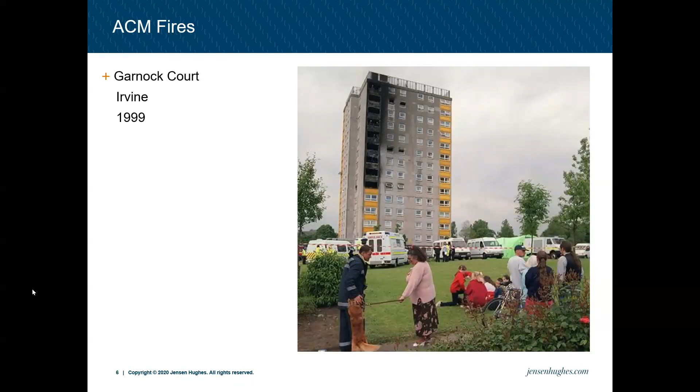So what is aluminium composite cladding? Well, effectively, an aluminium sandwich with a plastic core. The sheets of aluminium are typically 0.5 millimetre thick, and the core, plastic core, is about 3 to 4 millimetres thick. This core has typically been made of polyethylene, which is highly flammable. Next slide.

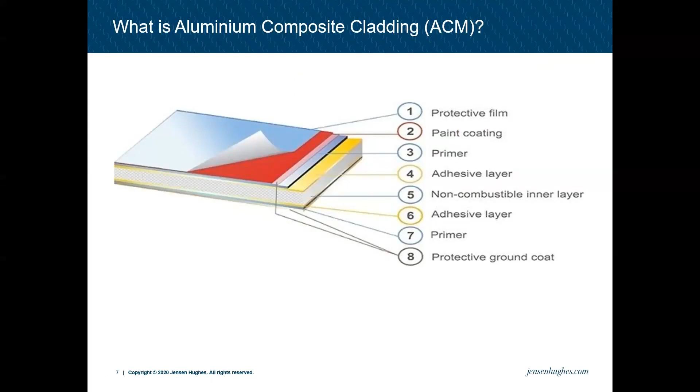There have been many ACM fires over the years, and I've listed perhaps the most well-known of them. Next slide. The first occurred in 2009 in the Television Cultural Center in Beijing, and this is one building which is aflame. Next slide.

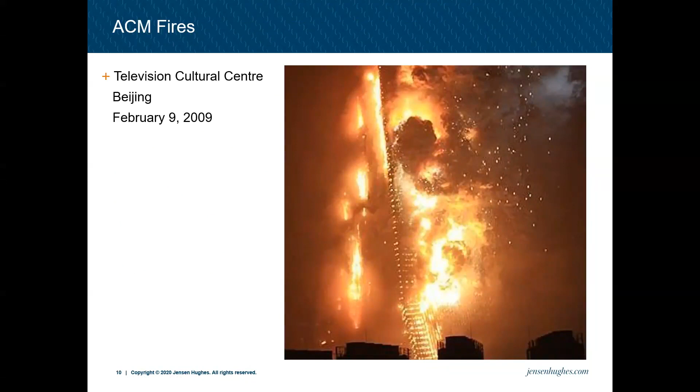And 5 years later, in 2014, there was a fire in the Lacrosse building in Melbourne. Again, rapid vertical spread and horizontal spread of this fire.

ACM was popular and is popular in Dubai, and there have been several ACM fires. The best known of them are the Address fire, which occurred in 2016.

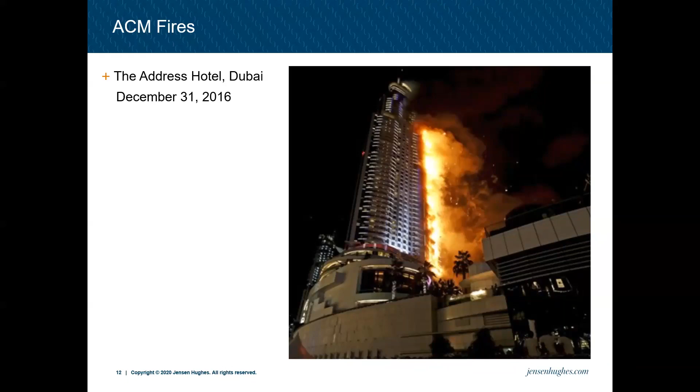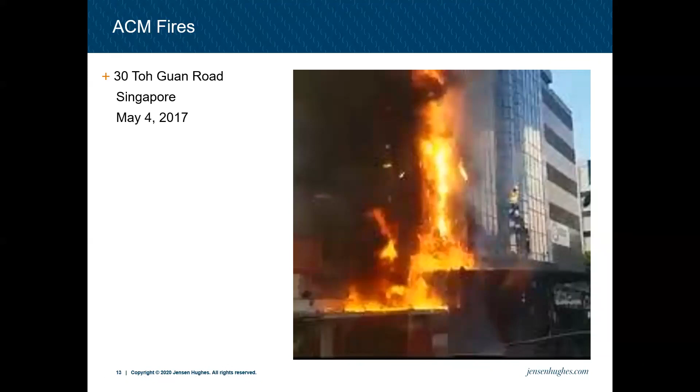And there was a fire in the Torch building, which I'll illustrate in a minute. But this fire is interesting. It occurred in Singapore. Sadly, a lady was killed in the stairwell, which was open to the cladding. And quite how this fire originated is not known to me, but it spread very quickly up the external facade.

Note the date, May the 4th, 2017. And the next slide shows the Grenfell fire, in which 72 people perished just 6 weeks after the fire in Toh Guan Road in Singapore. Rapid vertical spread from the floor of origin to the top of the building within 20 minutes. And then the fire began to wrap itself round the building, having spread at the crown and spread downwards. Most unusual fire spread.

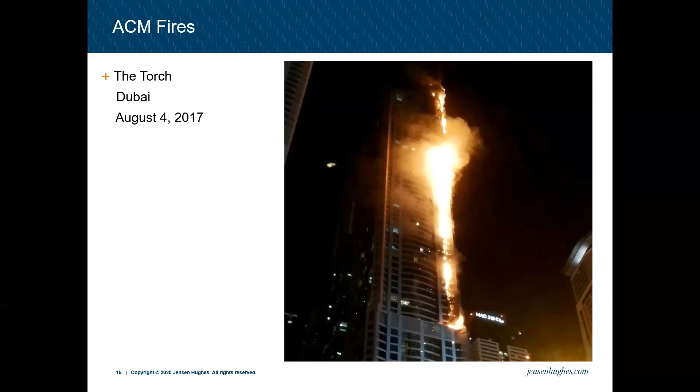We're also concerned with high pressure laminate fires, and there have been 3 fires of note within the UK.

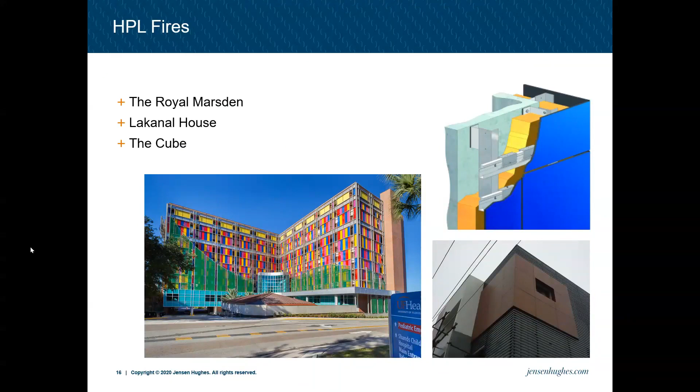At the Royal Marsden Hospital, which was well documented. There were TV crews there to record the spread up one of the towers of the hospital, and then the roof became engaged.

Better known, the fire at Lakanal House in 2009, in which 6 people died. Interesting fire spread both vertically upwards and vertically downwards in this case.

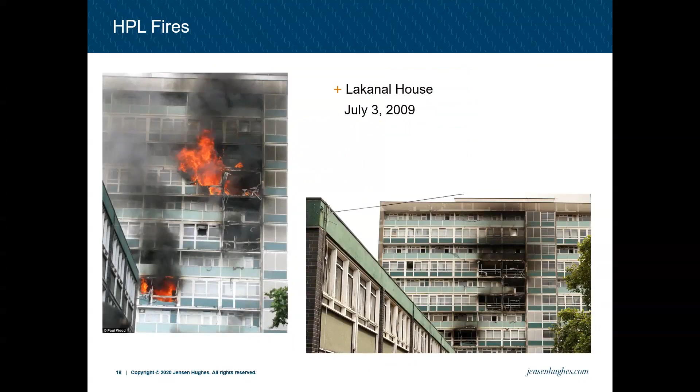And more recently, the fire at the Cube in Bolton.

These fires have caused a lot of research to be done, and this latest paper that came out in the early part of this year by McKenna et al. compares the fire behavior of different types of modern facade materials, and I've summarized the results on the next slide.

What you will see is that the peak heat release rate of ACM and of HPL is 55 times and 25 times higher than the least flammable panels, and they release a lot more energy over a longer period of time.

They also compared in their tests polyisocyanurate foam (PIR) and phenolic foam with the least flammable sorts of insulation, stone wool and rock wool. And you can see there that the total heat release rate from a polyisocyanurate foam is 35 times higher, and a phenolic foam even higher than that, 48 times.

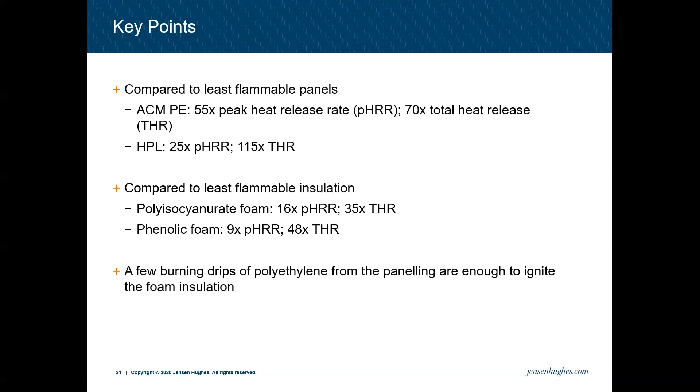So there is a lot of energy contained and able to be released in a fire with these insulation materials. And one of the things that the researchers note is that a few burning drips of polyethylene from paneling are enough to ignite the foam insulation. And with that, I'll hand over to Ben, who's going to talk about the present climate in the UK.

Thank you, Jim. Before I get onto the present climate, it's probably worth a few slides which cover the climate prior to Grenfell, because I think that helps inform how we got to where we are.

So on the first slide, this is showing the trend in fire-related fatalities in England in the 15 or so years prior to Grenfell. The top line in the graph is showing fatalities in dwellings, which is where the vast majority of fire deaths occur. As you can see, the trend is broadly positive, from around 350 a year at the turn of the century to just over 200 in the years immediately before Grenfell.

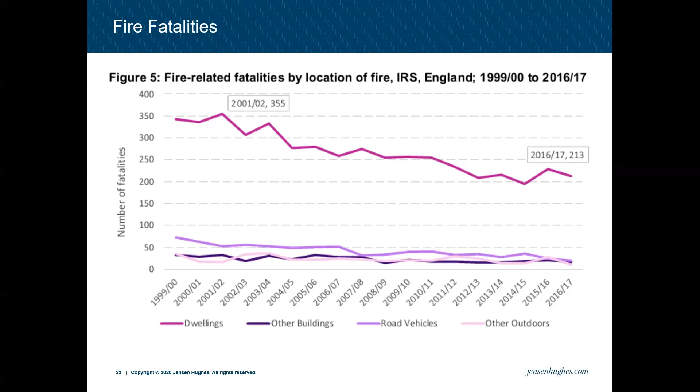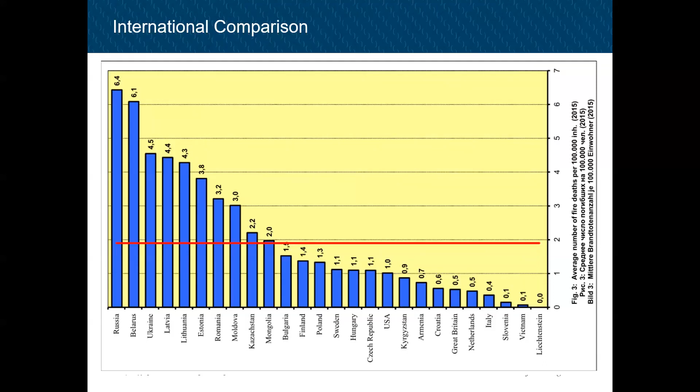That also compares reasonably well internationally. This graph is showing data collected by fire brigades around the world. Now, international comparisons are very difficult, as we're constantly hearing about with COVID at the moment, but it's equally true of fire statistics. Different countries collect data in different ways, so it's probably not a perfect comparison, but as far as it goes, it looks pretty good. Great Britain is down there in the bottom right at around about 0.5 fatalities per 100,000 inhabitants, and that compares pretty favourably with the rest of Western Europe, and certainly better than countries in Eastern Europe, for example.

So another factor which has perhaps influenced the climate in the run-up to Grenfell was... what's the word I'm looking for?

Building control has been deregulated since about 1985 with NHBC, and approved inspectors since 1997. That's brought competition into building control, with developers essentially being able to choose who approves their building. Some would certainly argue that's been a factor in how standards have changed. Personally, I'm not so sure how much of a factor it is, but it's certainly been raised by some.

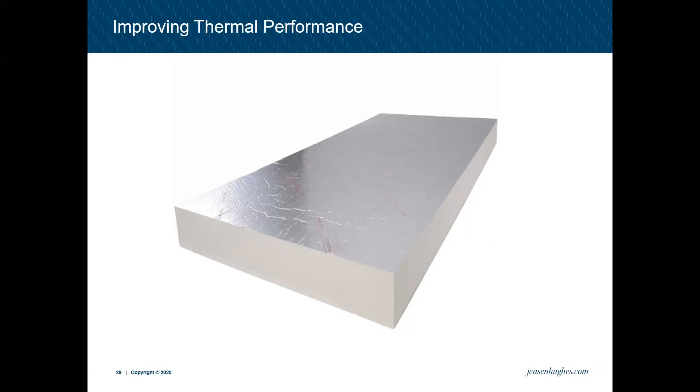Another factor is the use of combustible foam insulation, which Jim touched on, typically phenolic foam or PIR foams. They've been used for perfectly good reasons. Principally, they perform a lot better than non-combustible alternatives, such as mineral wool. So you need less thickness of foam to achieve the same performance, meaning a developer will get a bigger flat for their plot size. They're also easier to work with and lighter. So there are significant advantages in using them, at least from a non-fire point of view.

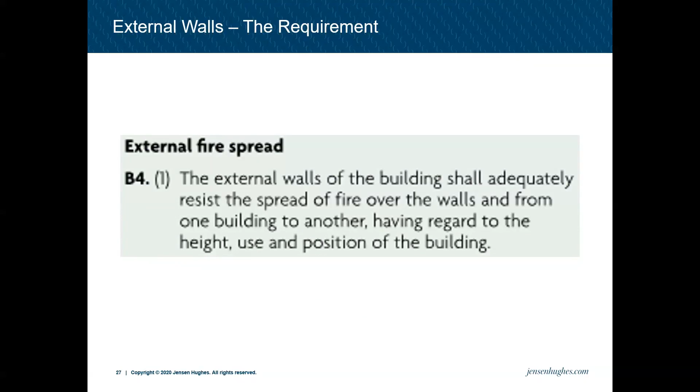So if we go back to the fundamentals, this is the requirement we're looking to achieve for external walls. This is the building regulations requirement, and as you can see, it's fairly short and sweet. The requirement is that external walls should adequately resist the spread of fire. What that means isn't defined. Certainly for low-rise buildings, there is no specific guidance unless you're very close to a site boundary. For what are known as high-rise buildings, with a floor over 18 metres in the UK, or England at least, there are two options given in the guidance.

One option is to use limited combustibility materials, essentially materials which don't contain large combustible content and don't burn very well. I appreciate there's going to be a big debate in the Grenfell inquiry as to whether the guidance actually covered ACM cladding adequately, but we're not going to get into that here. The other option given in the guidance is for the whole wall assembly to meet the performance criteria given in BR 135 using full-scale test data.

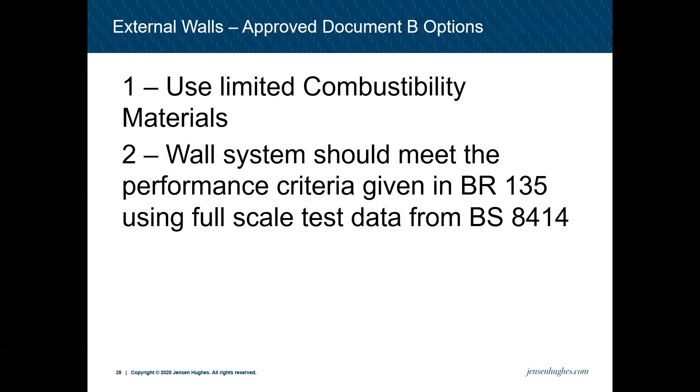This grew out of essentially ad hoc tests carried out at the BRE back in the late 80s, and this led to the development of the BS 8414 test and the BR 135 guidance, which is the only measure of fire spread that relates back to that building regulations requirement and defines what is an acceptable rate of fire spread. Jim is going to talk more about the fire testing in detail and what these ad hoc tests have evolved into in the next section.

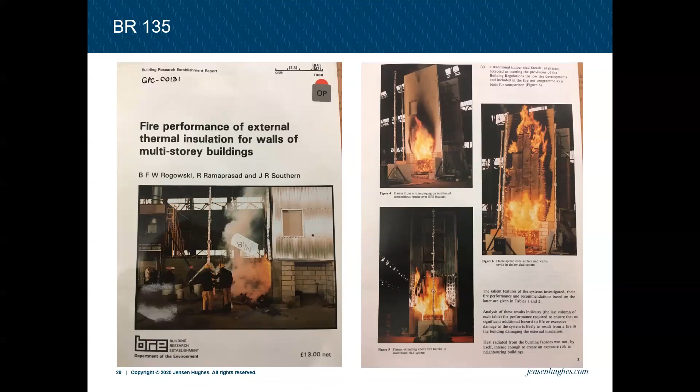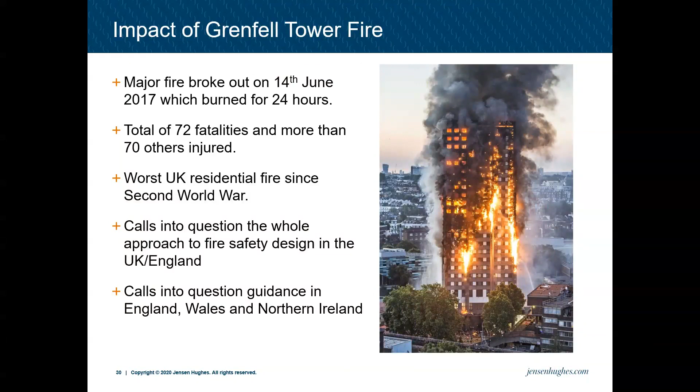So Grenfell Tower, Jim talked about it. It's obviously going to change things enormously in terms of the approach to fire safety, the whole regulatory system, and the guidance applicable to buildings in England and Wales, and beyond.

So the government response has been multi-stranded, as you'd expect with such a major disaster. Initially, it's focused on testing of wall systems with ACM cladding. There's then been a series of advice notes issued principally during 2019, with a summary of all those advice notes issued earlier this year. The public inquiry is ongoing and is currently in phase 2. There's been the Hackitt review of the building regulations and fire safety, essentially a review of the system. The key conclusion was that the construction industry is deeply flawed and needs a radical overhaul.

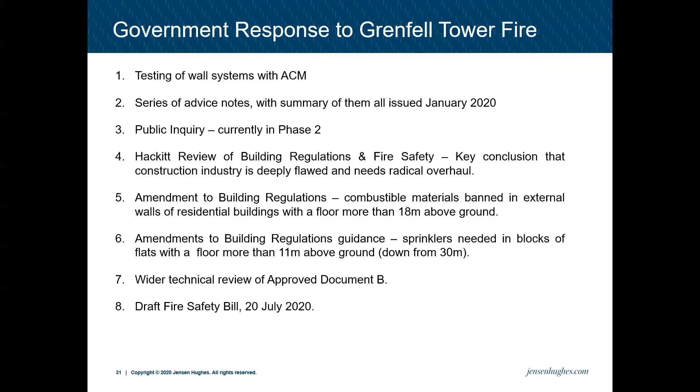There have been amendments to building regulations. Combustible materials have been banned in external walls of residential buildings with a floor more than 18 metres above ground. The guidance has also been amended to require sprinklers in blocks of flats with a top floor above 11 metres above ground, down significantly from 30 metres. There is a wider technical review of approved document B in the offing, but timescales are a little unclear at the moment, and it's going to have a very wide scope, so it might involve research and could take a while. The draft fire safety bill was issued last week, and that's the government's response to Hackitt, which I'll touch on more in a few slides.

So the government initially tested a range of ACM panels from buildings in small-scale tests. There are three categories: one is limited combustibility. Category 2 involves panels where the PE core has been treated to provide some degree of fire retardancy. Category 3 is where the PE core is unmodified, i.e. no fire retardancy whatsoever. The government tests showed that the vast majority of buildings used the unmodified PE core ACM. There was a proportion, less than 20%, that used ACM with some degree of fire retardancy, but there was no use of the limited combustibility ACM.

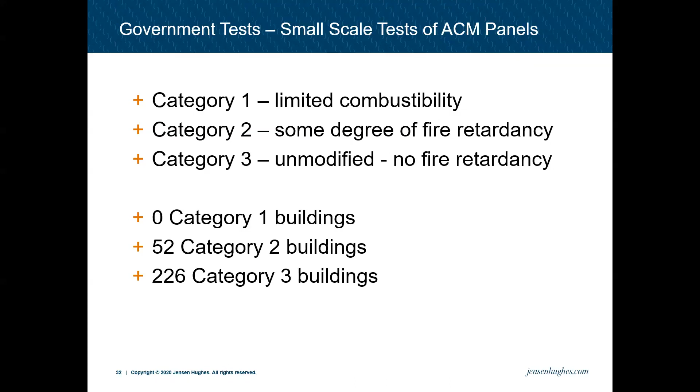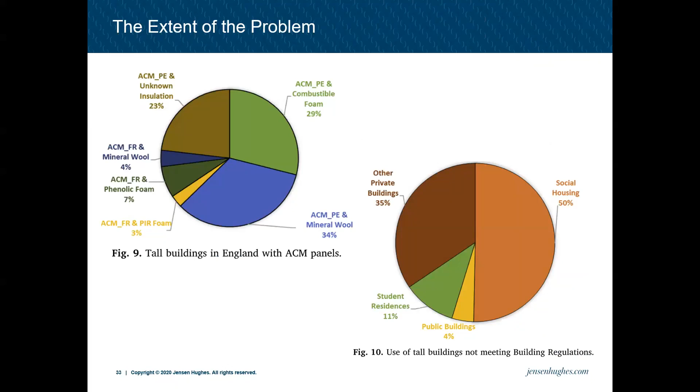That's also been reflected in other studies, as shown on the next slide. Again, this shows the vast majority of ACM actually uses unmodified polyethylene cores, in conjunction with all types of insulation. Up to about 20% of ACM in use is fire retardant to some degree, but there's little or no use of limited combustibility ACM. This ACM has been used on all sorts of buildings, from social housing to private dwellings, and significantly on student residential buildings.

The government then moved on to some full-scale tests based on the BS 8414 criteria. Art is going to talk about these shortly, so I won't dwell on it, but the key conclusion was that unmodified polyethylene ACM was a problem irrespective of the insulation material it was used with. Fire retardant polyethylene was probably inadequate if used with combustible foam insulations, but might be adequate if used with stone wool insulation.

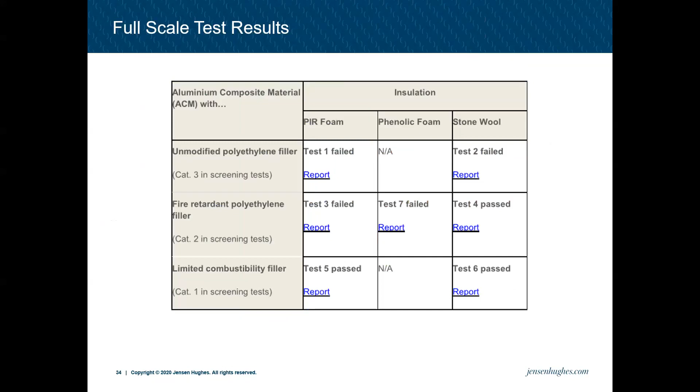The focus then moved, to some degree, from ACM to systems that don't incorporate ACM. As I mentioned, the government issued a series of advice notes. This is probably the most notorious - advice note 14. It's essentially a decision tree, and the first question it asks is: are the materials, including the panels and insulation, of limited combustibility? If the answer is yes, you end up in the left-hand green box, which is good.

If the answer is no, the secondary question is: has the system been tested to BS 8414 and achieved the BR 135 criteria? If the answer is yes, you end up in the right-hand green box, which again is a good result. But the problem was that a large proportion of buildings don't get a yes answer to either question, so they end up in the red box, where the advice is to seek professional advice and consider remediation.

This provoked problems with mortgage lending. Mortgage lenders got wind of the issue, and the fact that they could be lending money on dwellings, on flats, for which significant remediation works could be required to the block in which the flats are located.

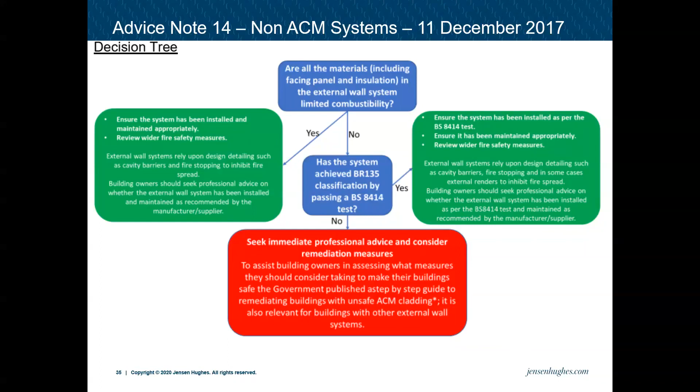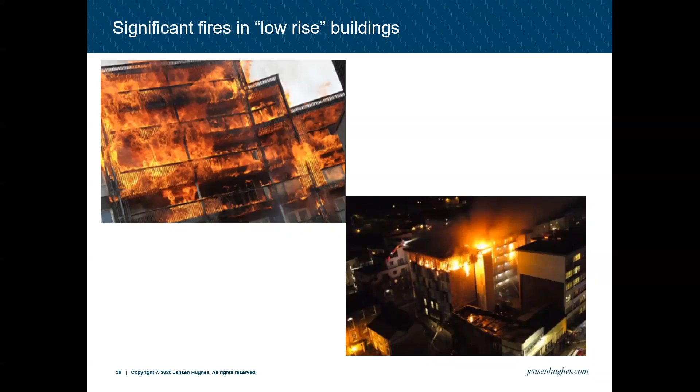So the concerns with respect to lower buildings have been reflected in government advice. For example, this extract from the advice note in January makes the point that people carrying out assessments of external walls need to consider the building regulations requirement I referenced earlier. So even where the appropriate guidance, being Approved Document B, doesn't actually give you any guidance as to what's appropriate, the government is saying designers and assessors need to consider the fundamental building regulations requirement.

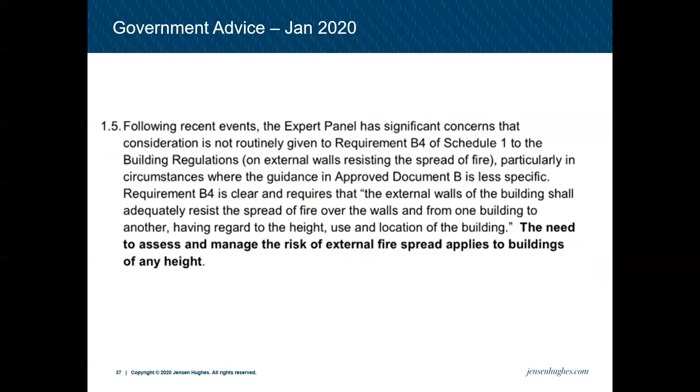The draft building safety bill was published last Monday, and this is the government's response to Hackitt, and that's obviously affecting the climate to some extent. It's probably the best part of 4 years - that seems to be the best estimate as to when this is going to come in. But people are aware that big changes are in the offing.

We can move on to the next slide. I've summarised the key changes. There will be a new national regulator for high-rise residential buildings initially. Initially, the scope will be 18 metres or 6 stories, but the scope may extend in the future - it may cover other types of buildings beyond residential.

With respect to existing buildings and external walls, the key requirement is that building owners will need to develop a safety case to go to the regulator for approval. Exactly what this will mean in practice is not 100% clear yet, but I think we can safely say the regulator is going to be very interested in the fire performance of external walls. So the point I'm trying to make is that anything we do now with respect to external wall assessments ought to bear this in mind, as it's something coming down the line, even if it may be 4 or so years before that happens.

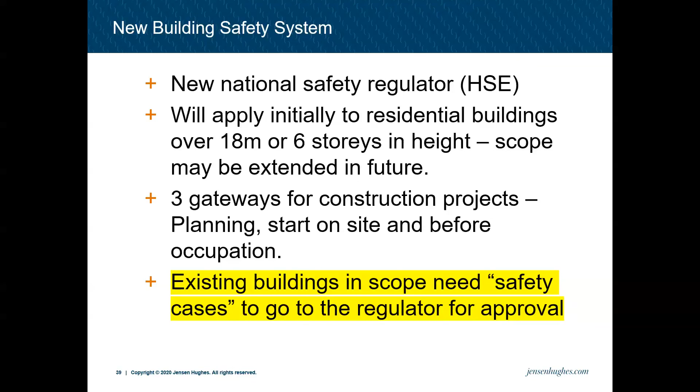Thank you, Ben. What I'd like to do is spend a couple minutes talking about fire testing and how we use that in terms of trying to meet the regulations. As Ben just indicated, the regulations state that the external walls of buildings shall adequately resist the spread of fire over the walls.

So there are a couple of options to meet those regulations. The first option is to utilize limited or non-combustible materials. It's quite obvious that if the materials won't burn, then we will meet the regulations to demonstrate that we adequately resist the spread of fire over the wall.

The most common method for demonstrating compliance is to conduct large-scale testing, which qualifies the exterior wall assembly. Another option, which is not really favorable at this point in time, is to conduct a desktop study. It needs to be conducted by a qualified specialist, and the performance criteria of BR 135, which utilizes testing in accordance with BS 8414 as the test data, is the basis for any of these evaluations.

Another option is to conduct a holistic fire engineering approach to determine how the material or assembly will perform. But any approach taken needs to have some form of large-scale fire test data which demonstrates the fire performance of that assembly and meets the qualifications of the applicable regulations.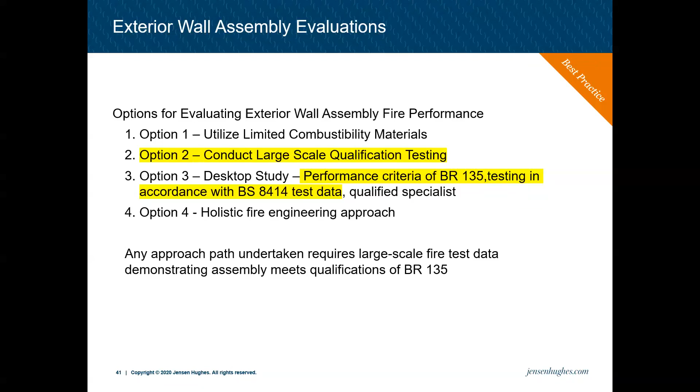So when we conduct large-scale fire tests, the key component is that this is a test of the exterior wall assembly. It's the entire assembly itself, not a material test. We're looking at the different materials being installed in that assembly, as well as the installation techniques.

The assemblies are subjected to realistic fire exposure conditions. These are not bench scale or laboratory scale sized exposure tests. These are very large fire exposures conducted in carefully controlled laboratory conditions, which allows for very good repeatability of test results so that we can compare assemblies, knowing that all of them have been conducted and evaluated in the same manner.

The testing, and I'll get into more details of the assembly later on, is basically a visual monitoring of the flame spread up the exterior face of the wall assembly, as well as monitoring temperatures within the core of the assembly and on that external face.

This is a pass-fail test. This is not a graded test. One sample is not judged to be better than the other. One assembly is not judged to be better than the other. It's either they pass and meet the requirements, or they do not meet the requirements.

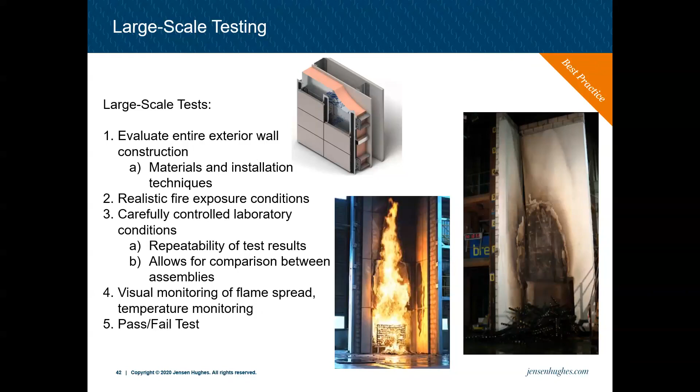In particular, the BS 8414 test is a large-scale test. There are two parts to it. Part one has a masonry backup wall, the base wall, which I'll talk about in a minute, and part two uses a structural steel wall. This is more realistic, or representative of how the actual construction will occur.

Again, we're looking at flame propagation mainly over the exterior wall surface. We don't want to see fire spreading up the vertical face of the assembly, but we also don't want to have fire burning within the interior, in the combustible core within the wall, because that leads to issues with the fire brigade for extinguishment.

This is a 30-minute fire test, so as long as we get 30 minutes of acceptable fire performance, that's deemed acceptable by the regulations. There's also a mechanical performance consideration part of the test, which evaluates whether the material stays in place, whether we see any further ignition, burning or charring of the material, or melting and dripping—some of the characteristics mentioned earlier that can lead to spread of fire.

The apparatus is a large, multi-story apparatus: 8 meters high by 2.5 to 2.6 meters wide. We incorporate a 1.5 meter wing wall to create a re-entrant corner, which increases the burning of the sample face because of re-radiation from that re-entrant corner, that exterior wing wall. The fire source is a 550-pound wood crib, which simulates the fire source down low from a lower floor, impinging up on the face of the wall.

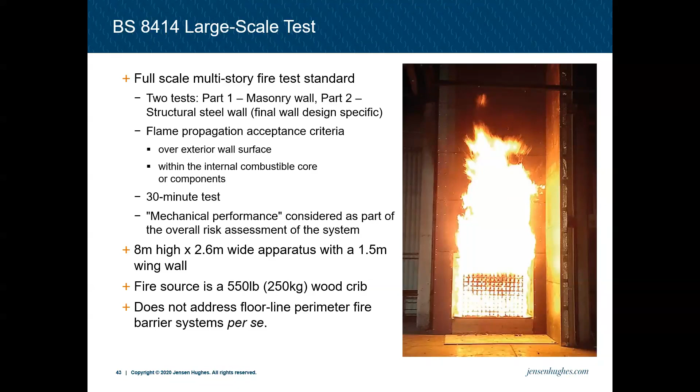So this is a little side schematic of this. Again, this is an assembly test, and I want to reiterate this again and again: we are not evaluating components, we are not evaluating systems, we are not evaluating products. What we're evaluating is the constructed assembly, which includes the insulation materials, whatever that exterior cladding material may be, and the attachment system. How is it all constructed?

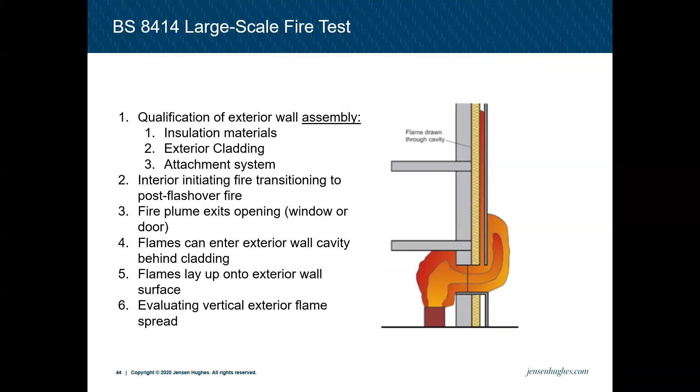Again, the fire is simulating an interior fire that transitions to a post-flashover fire, with the fire plume exiting out a window opening or a door opening. The flames can either, by virtue of how we construct the wall assembly and run the test, enter the exterior wall cavity, or come up over the face of the wall and burn up the exterior face. We're monitoring vertical exterior flame spread, either vertically inside the core or on the exterior face.

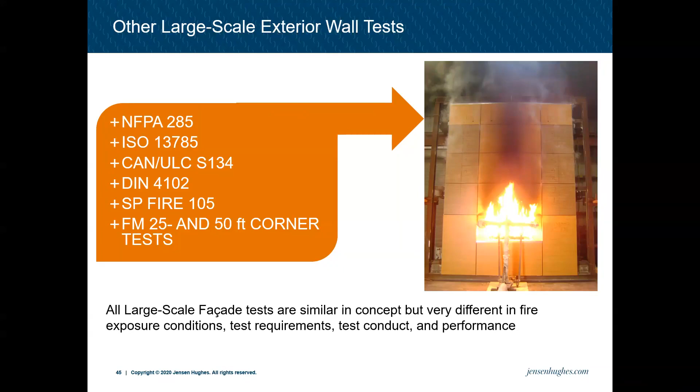This is a schematic to show you what we're looking at in the exterior wall assembly, starting from the outside: the cladding materials, whether they be ACM material, HPL, or some other combustible material; any interior insulation materials, whether combustible or non-combustible; if there's a combustible water-resistive barrier material inside for the building envelope, that's considered part of the assembly; and then the base wall assembly, whether it be masonry or a steel stud and gypsum wall assembly. Other components included may be cavity barriers, anything done at the header at openings to protect that area and prevent fire from getting up into the air cavity space.

We may be evaluating the attachment system. One of the other components we incorporate into this is actually the air cavity space, because that plays a key role in how the fire may spread vertically, either on the interior or exterior of the assembly.

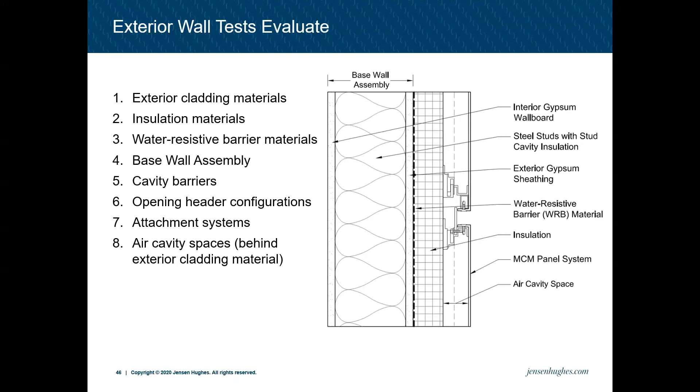Next slide, please. So large-scale testing has many uses. It can be used for research and development, for the development of different products or assemblies, but usually it's used for qualification testing. A manufacturer will have an assembly or product they want to use, and they'll go out and test that for qualification.

Large-scale testing can also be used for post-fire forensic testing. For instance, after Grenfell Tower, BRE ran a number of tests to try and understand what happened. In test 1, they used one of the category 3, unmodified ACM cladding materials, over a PIR insulation. The results showed that the flames extended over the top of the apparatus very quickly.

So then scientifically, we changed out the insulation material, the combustible PIR, with a non-combustible or limited-combustible stone wool insulation. But the flames still extended up over the top of the wall assembly very quickly. So at this point, it looks like you're going to point towards the cladding material as being the culprit.

So they changed out the ACM material from an unmodified PE ACM to one that has some fire retardant in it, category 2 ACM, back with the PIR insulation. That assembly failed, with flames over the top of the apparatus 25 minutes into the test, very close to the end. Now, that could be an issue with how it was constructed, in terms of air gaps, air cavity spaces, attachment systems, and things like that. So that could be investigated further to try to come up with a system with those components to see if it can work.

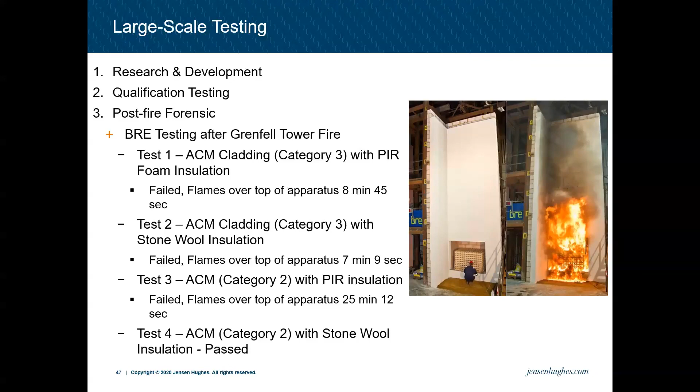So by methodically working our way through different variations of the exterior wall assembly, we were able to evaluate the performance. Small scale testing can also be used in evaluating exterior wall assemblies.

The small scale test can be used to evaluate component combustibility, and if the components are deemed to be limited or non-combustible, then you're complying with the regulations and there's no need for a large-scale fire test. So we do allow some component testing, but only when they're all non-combustible. That makes sense because if I have materials that don't burn, I don't have a fire hazard.

The other thing these small scale tests will do is provide a lot of fundamental material burning characteristic data, such as heat release rate and total heat release. We can also look at time to ignition, how quickly the materials ignite. We can determine the heat of combustion, the amount of energy contained per unit mass of that material, and get a feel for how much potential it can contribute.

We use this a lot of times to rank order materials and try to understand which material is better or worse than another, to understand what that implication may be in the large scale testing.

Small scale testing can also give us a little bit of information on the material fire performance characteristics of that specific product in terms of melting, dripping, flowing, or pooling, so we can understand based on the type of material how it performs.

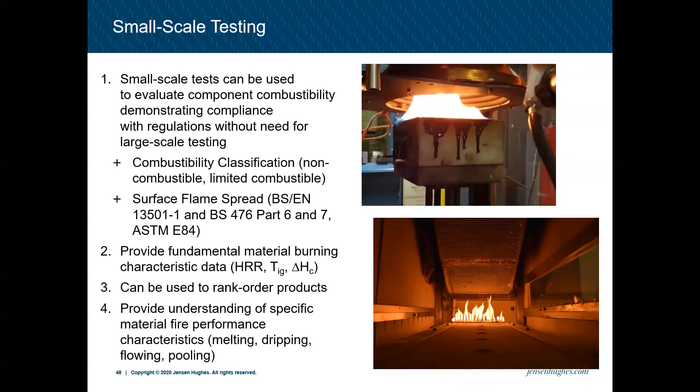So again, large-scale fire tests are assembly tests. We're looking at the entire assembly, and minor changes to the assembly may have significant outcome on its performance. But the one thing is that fire testing is deemed to be providing definitive answers to the actual fire performance of that assembly.

Usually, because we trust these large-scale fire tests, they are almost always accepted as proof that this assembly does or does not meet the requirements. The issue becomes that running a large-scale test is very cost prohibitive, and it's very difficult, if not impossible, for manufacturers to evaluate all possible exterior wall configurations.

So this is where the idea of desktop studies comes into play, because they can effectively be used to justify deviations to qualified test assemblies, as long as those are within certain bounds and known restrictions. Desktop evaluations rely on the experience and judgment of the evaluator, so they're subjective. They aren't as definitively accepted as a large-scale fire test.

So it has to be a qualified specialist doing this work. The other issue is that the quality of the input and the experience of the evaluator is directly linked to the quality of the desktop study. It's just like a computer model - garbage in, garbage out. If you have good information going in, you're going to get a better quality desktop study.

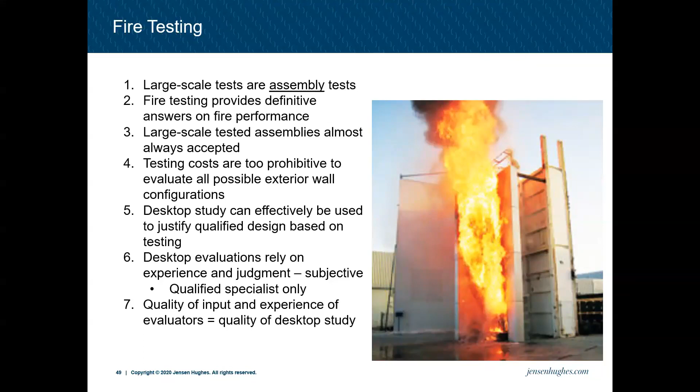So at this point, I'd like to turn it back over to Ben for a little bit on remediation and EWS.

Thanks, Art. Okay, so I think where I left off was with the issues with mortgage lending with flats in blocks with cladding issues. So the EWS1 form was intended to address that issue.

The idea is that it would provide a consistent and structured manner to carry out assessments, which would enable assessors to state that the building had been looked at and it was adequate, or the external walls were adequate.

I touched on earlier the issues with buildings under 18 metres, and I've highlighted that there. It wasn't really intended for buildings under the 18-metre threshold, but in practice we're finding that EWS1 forms are being asked for buildings below that threshold.

So it gives you two basic options. One is option A, where the primary materials in the wall are unlikely to support combustion. So if you've got limited combustibility materials, as Art mentioned, you put them together, you're probably not going to have a problem.

Option A1 is I guess the most favoured option, where it's straightforward - you're just looking at a wall.

It then gives you two options for buildings with what they call attachments, which typically means balconies. The reason for that was there might be, if a building has balconies with combustible materials or particularly problematic combustible materials, the mortgage lenders might take account of that, because any remediation works needed to the balconies would be less extensive than if it involved opening up the external walls.

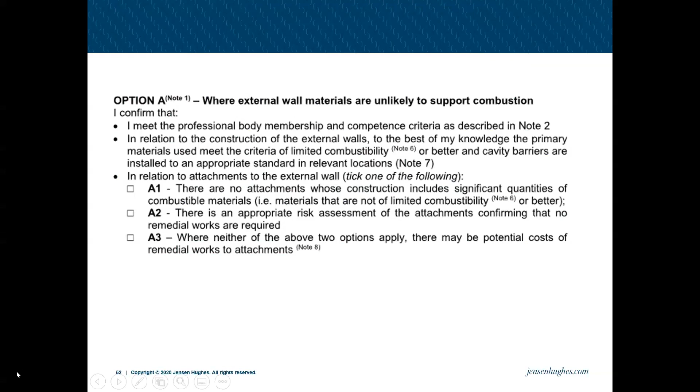The other option is option B, where there are combustible materials present in the external walls. That tends to be a more involved and extensive assessment. If we can move on to the next slide, please, Alex.

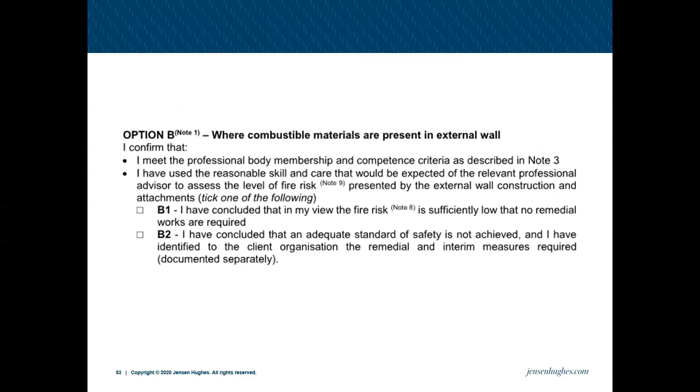The EWS1 form does give fairly clear guidance as to how the assessment should be carried out. It should take account of regulations and guidance, both currently - new guidance, which has changed significantly - but also that which was current at the time of design and construction. So it's asking you to refer to a clear benchmark. It's not a matter of opinion of the assessor. It does need to be benchmarked against published guidance.

So the approach we've been adopting in JGA has been to, first of all, review the documentation, then carry out inspections on site to confirm materials and that cavity barriers are where they should be and installed correctly, and take account of any particular issues associated with attachments such as balconies and risks that the geometry might represent in terms of fire spread to or from balconies.

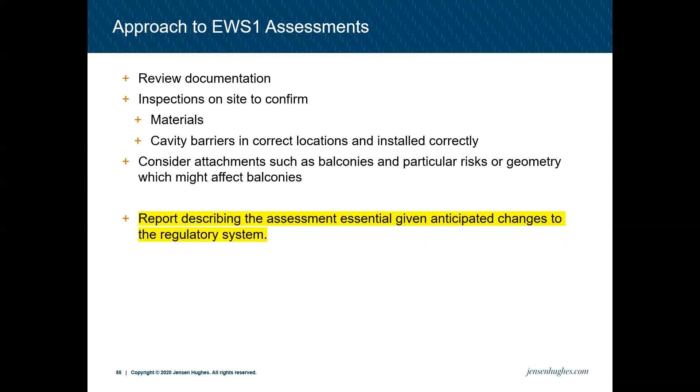We've taken the view that a detailed report describing the assessment is essential, particularly given the changes in the regulatory system that are coming down the line under the new fire safety bill. We don't see it as adequate simply to sign the form.

So for systems with combustible materials, one option is obviously remediation works to remove the combustible materials, but it can be possible to support a B1 conclusion, which is the other positive conclusion given on the form. So that might be based on existing BS 8414 testing and system certification. It might be based on a desktop study carried out at the time of design and construction, provided that desktop study was suitably robust. Another option is new 8414 testing of the as-built wall system.

A new desktop study is in principle possible. There is a recently published BS 9414, which gives guidance on how to carry out desktop studies. Now, no doubt, because of the poor reputation that desktop studies have, it's extremely prescriptive and probably quite conservative. So in practice, we've not, to date at least, found an opportunity to apply it. It requires a great deal of test data of very similar wall systems, which in practice doesn't tend to be available.

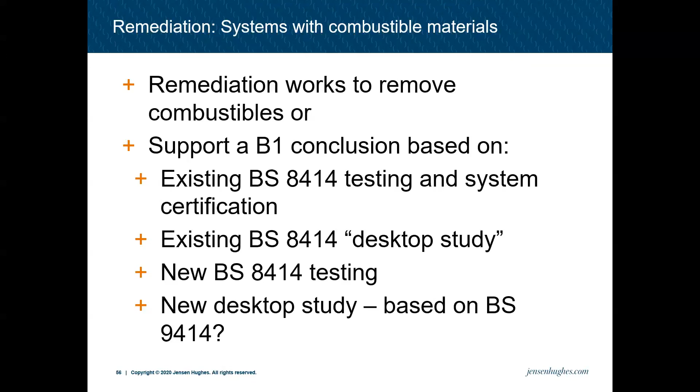So common findings are: a common one is no records explaining the justification for the use of the materials. Equally common, I guess, in our experience, is that there might be records indicating that building control were consulted and agreed the use of the materials, but there's no technical evidence explaining the basis for that decision. We're finding a lot of complex facades with multiple wall systems, some of which might have suitable justification, some which don't. Another common finding is that there is test data or a desktop study available, but the wall build-up, the wall system, doesn't match that. The next slide shows an example of that.

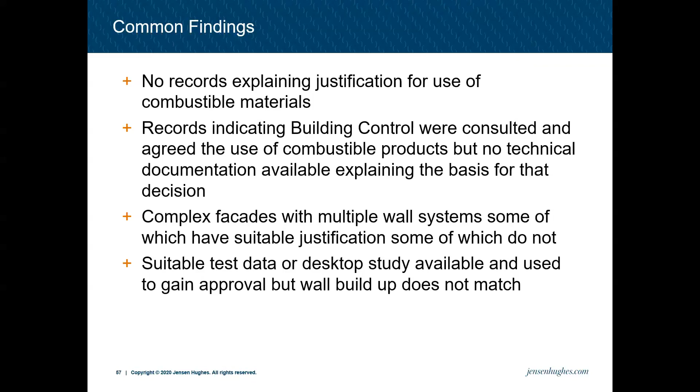BS 8414 tests are typically carried out with barriers around the hearth opening where the fire is located. And the hearth opening is intended to represent fire breaking out of a window.

Guidance recommends cavity barriers - sorry, Alex, if we go back one. Guidance recommends cavity barriers are provided around windows, but we occasionally find buildings where that's not been done, i.e. they've been omitted and only provided at slab level and party wall level. However, if the system has been tested assuming cavity barriers around the hearth opening, then the as-built building should include cavity barriers in those locations.

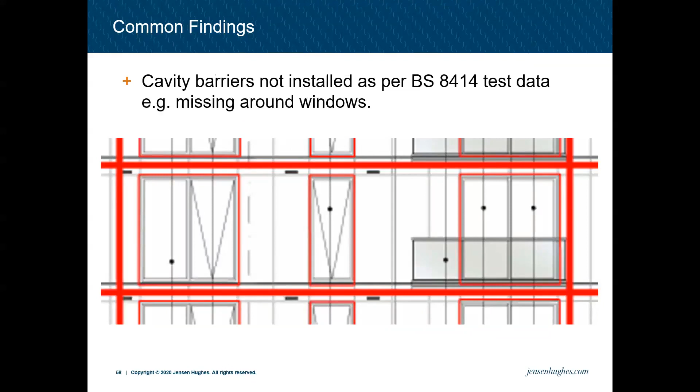Next slide, please. We occasionally find cavity barriers are not installed in line with manufacturer's instructions, usually the wrong way round or with excessive gaps. Occasionally we find gaps at junctions between cavity barriers or gaps where the cladding support rails penetrate the cavity barriers. So cavity barriers tend to be a big issue.

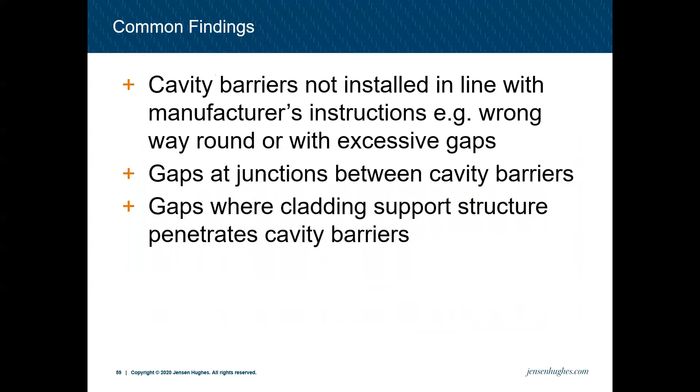So approaches to resolving issues, as I touched on before: removing combustible materials is an option, full-scale testing for the as-built system, or modifying the system and carrying out full-scale testing. These three are the common approaches that we're finding.

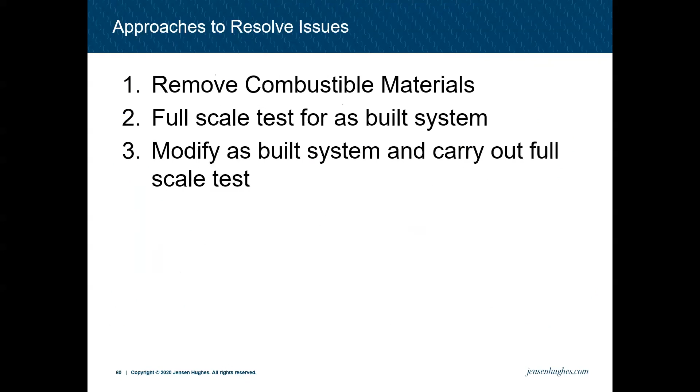And with that, I'll hand back to Jim to conclude the presentation. Next slide, please, Alex.

So the effect of the EWS1 certificate is that buildings are blighted. The London residential market is going to grind to a halt because either the building doesn't have a certificate or the flat owners cannot get a certificate. Remember that the EWS system was designed to certify whole buildings and not individual flats.

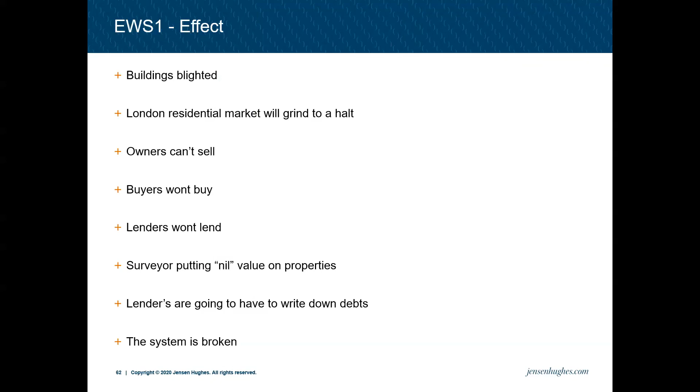So that's resulting in owners who can't sell, buyers not buying, lenders not lending, surveyors putting nil values on properties - an absolute nonsense in my view. And lenders are going to have to write down mortgages. The system is truly broken. Next slide.

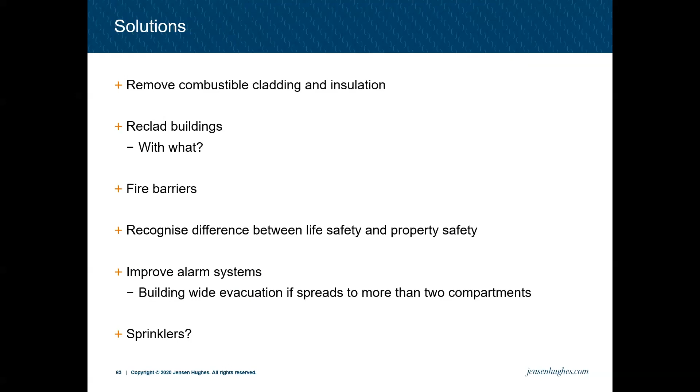Ben has outlined the solutions, from removing combustible cladding onward. But some of the other solutions involve recognizing that building regulations are about life safety, not property safety. So you could adopt the Scottish solution, building-wide evacuation if a fire spreads to more than 2 compartments, by improving the alarm system. Sprinklers, of course, are an option to consider, and it's encouraging that English regulations now look to install sprinklers on buildings over 11 meters in height.

So the owner's response has been: who can we sue? Can we claim on our building insurance or our NHBC certificate? How can we pursue our loss? They come to companies like JGA and ourselves saying, can you do a building-wide assessment on our building? The owners have lots of targets.

They've got an insurance policy they may be able to claim on. They have a contract with a developer. The developer has engaged a designer, architect, specifier. There's a certifier involved, a contractor, a facade contractor, even, dare I say it, a fire engineer, chartered surveyor, and ultimately the lenders who have approved the lending on the building.

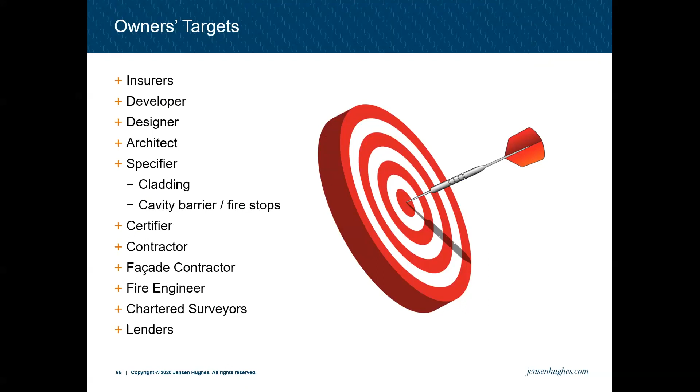This is a diagram from the Guardian newspaper on Grenfell. It's illuminating because it shows the complex relationships in the construction of high-rise residential buildings and in their overcladding.

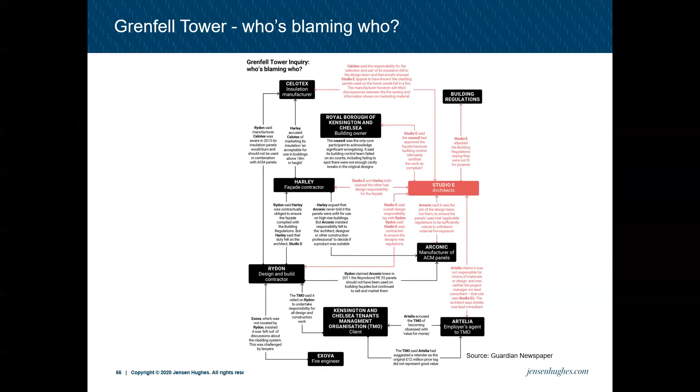So how can we help? We recognize we can't be on the side of angels every time, and sometimes we have to defend the indefensible as best we can. But these are complex issues, and that means the fault is rarely down to one single material, company, or individual. A proper perspective on liability that we can bring from our knowledge of the construction industry and fire safety engineering means we can illuminate liability. It also means we can utilize alternative strategies to minimize costs when non-compliant buildings have to be brought into compliance with current government guidelines.

So I hope this has been informative for you. Danny is going to host a question and answer session, and I'll hand over to her now.